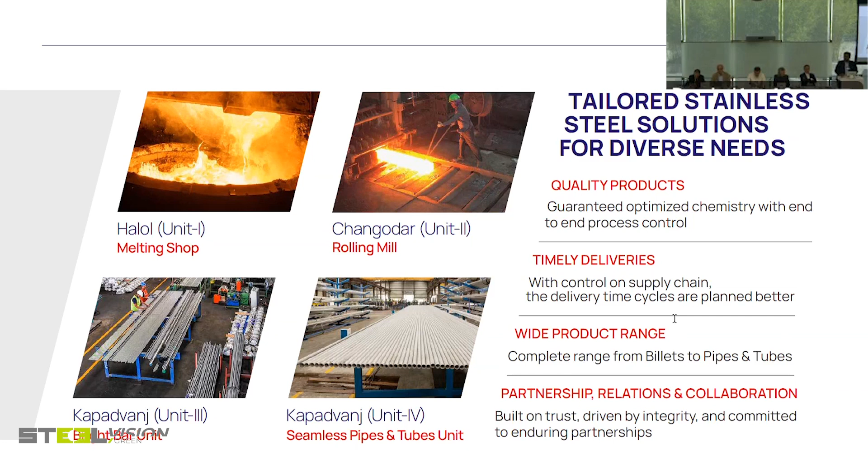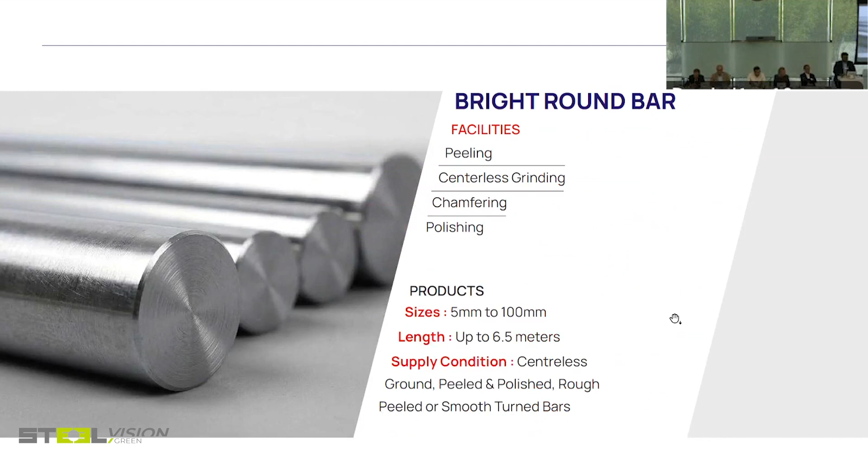So the first product is the bright round bar, where we are using our own produced black bars, peeling them, grinding them and finishing, where we are also doing polishing and chamfering. The size range is from 5 to 100 mm. Then we are doing hex and square bars. These are drawn bars. Then we are doing the straightening, polishing. We also have a shot blasting facility. The size range for this is from 16 to 53 mm.

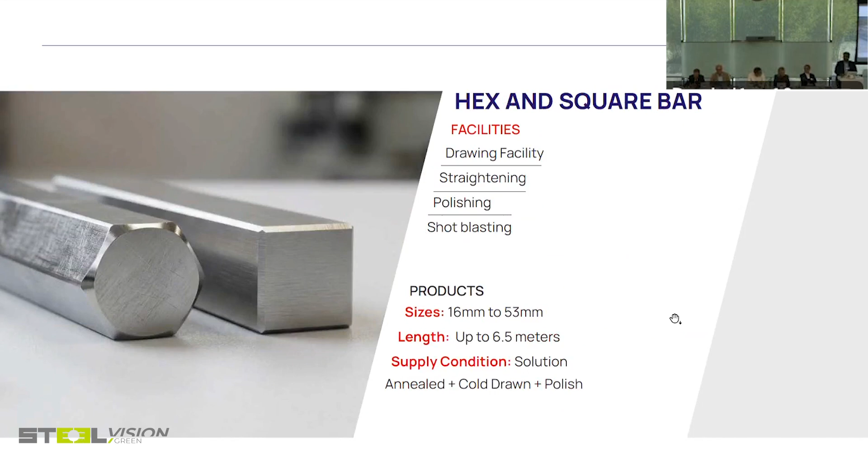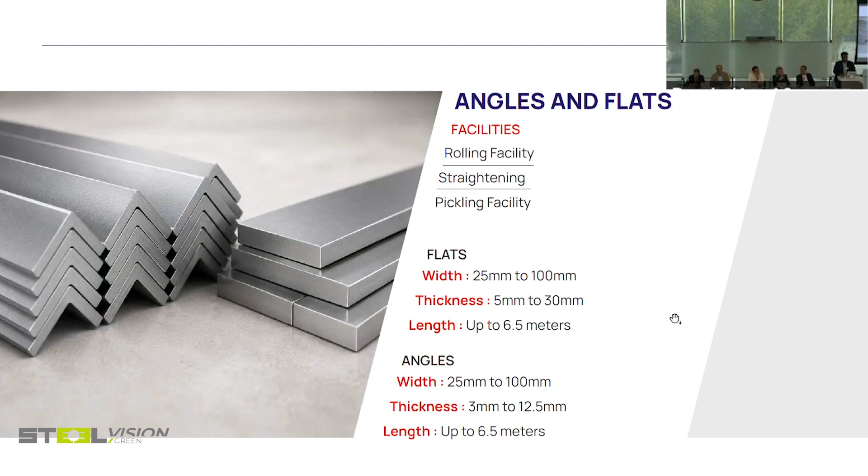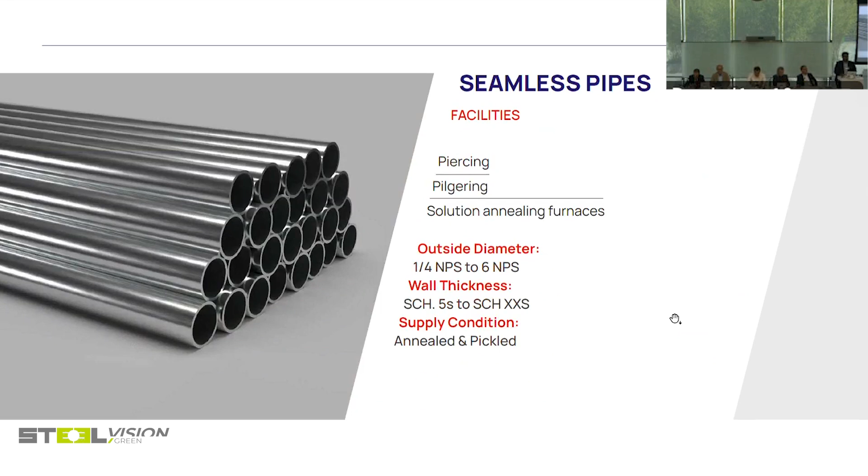We are also in profiles, where we are manufacturing angle bars and flat bars, straightening them and pickling them. So we are giving hot rolled, annealed and pickled angles and flats, ranging from 25 mm to 100 mm. Further, as said earlier, we are piercing our bars into hollows and drawing them into seamless pipes, where we have the annealing furnaces, and the size range for the seamless pipes is from 1/4 inch up to 6 inches with all types of schedules.

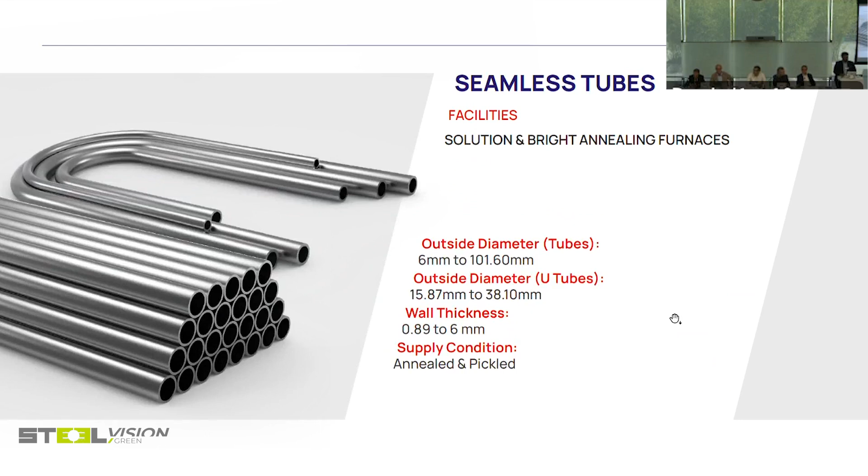These pipes can be further drawn into seamless tubes, where we are doing heat exchanger tubing. We are also doing normal tubing from 6 mm to 101 mm. As part of integration, we have an in-house quality lab where we have all these kinds of tests in-house: the PMI test, tensile test, all the destructive and non-destructive testing as well, like eddy current, hydrostatic testing, boroscope, and liquid and dye penetrant test.

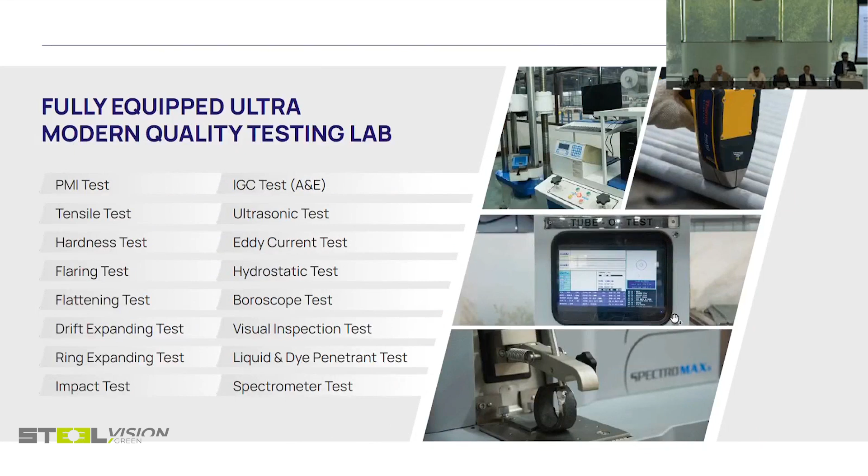We have all kinds of certification, whether it be ISO and PED, and we have a global presence where we are supplying to more than 20 countries worldwide. We are present in Europe as well. We are selling in Europe, in Italy, Spain, Belgium, France, Germany, Netherlands. Also the overall world, where we are selling to Latin America and North America, like Canada and Mexico.

So coming to the big topic, what we gathered here about the CBAM and the carbon emissions and the sustainability, how we are tackling that issue. That issue has been in talks for more than 2 years now, and I'm very happy to be present here to listen and know more about it from the professor and everyone. And it was a great learning experience, and I'll definitely take something back from here and implement it back in India.

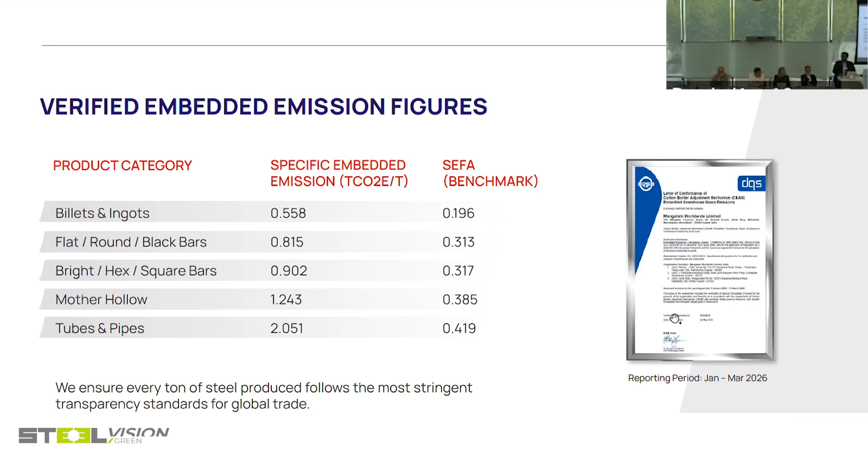We are adding some ferros, but what we have done is try to reduce the amount of ferros and ore products which are used directly from mining. We are using majority of scrap. We are blending different types of scrap, from low nickel to high nickel and everything.

Further, to reduce the carbon emissions, we have taken initiatives like investing in solar power plants. We currently have a 1.2 megawatt solar rooftop, and we have recently invested into a 10.4 megawatt solar power project, which will be commissioned by June. So overall, whatever energy we are using will be all green.

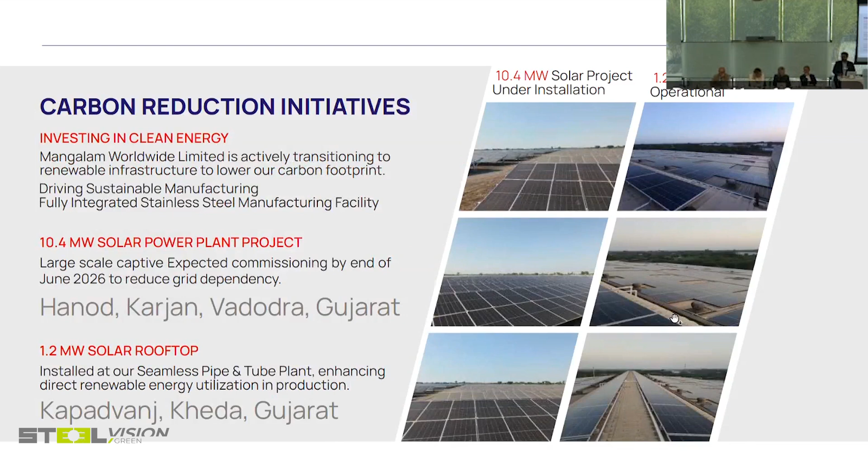Apart from that, in the logistics area where we are using our trucks, we are trying to change the trucks which are using diesel into electric trucks. Some of our furnaces are fired by oil, which we are trying to convert into gas-fired furnaces and electric-fired furnaces.

Another is we are having our own pollution plant, which is processing the carbon emissions released while melting and refining the steel. We are in talks with a company in India which is manufacturing reactors, where the gas which is processed is then put in the reactor and further processed. The carbon is further processed into different value-added products. So that is something which we are exploring. Whatever we are releasing after the pollution plant into the air, we can get it further processed and broken down, which will in turn reduce the carbon emissions.

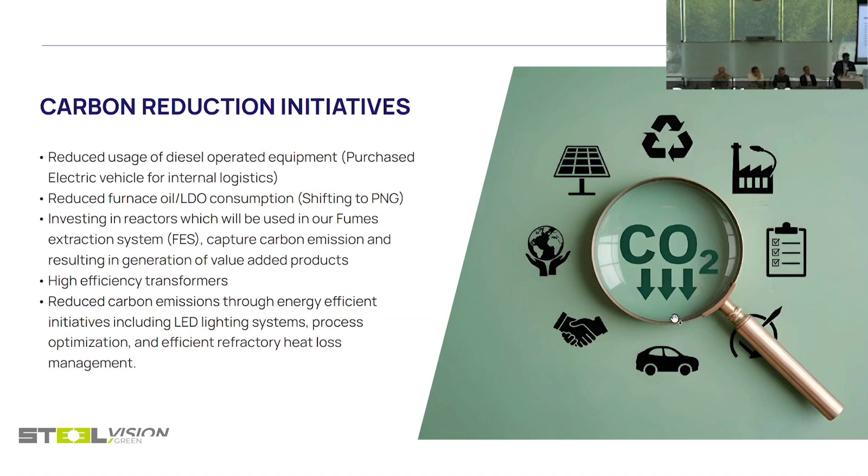And being an induction plant, we also have an AOD where we are using argon oxygen to reduce the carbon in the products and make the L grades.

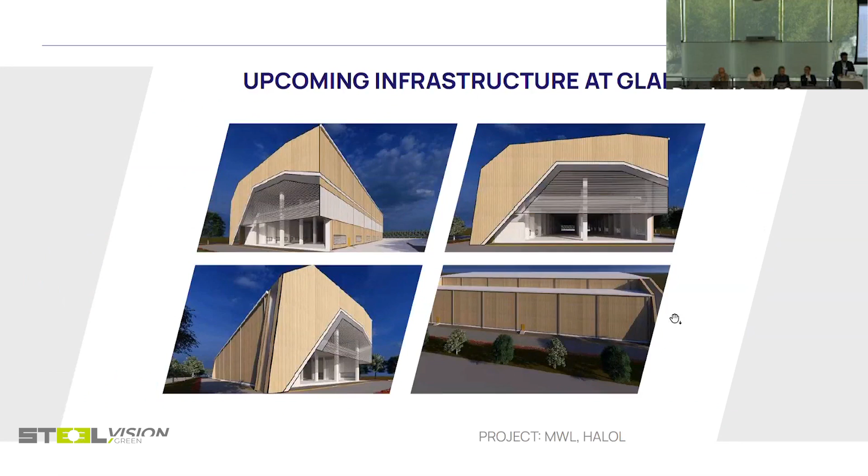Apart from that, we are now expanding into the finished products. We are increasing the capacity of the finished products, with an investment of around 100 crores, which is around 12 to 15 million euros. We are building new sheds and getting a new rolling mill and a new bright bar. But all these facilities are put in line with the objective that whatever we produce reduces the carbon emission further. This is just a glimpse of what we are trying to build.

So as part of Group Mangalam, we are also into CSR, which is corporate social responsibility. Our companies are listed on the exchange in India, where we have all disclosures. As part of CSR, we're giving back to the community with different wellness programs. We have training and development in the local area where our factory is present. We are giving education support, trying to get more people involved in the initiative, where we can get more education on the green part.